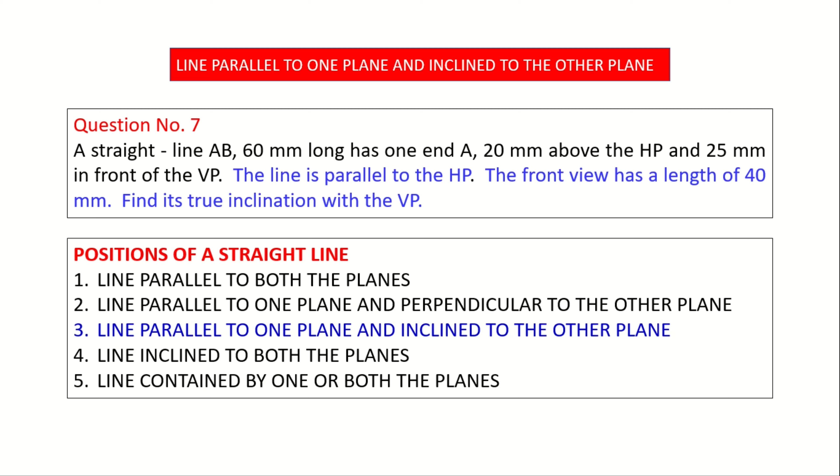It is given the line is parallel to the HP. The front view has a length of 40 mm. Find its true inclination with the VP. So, the position of the given straight line is: the line is parallel to one plane and inclined to the other plane. Also, the true length of the straight line is given, it is equal to 60 mm, and the end point A is 20 mm above HP and 25 mm in front of VP.

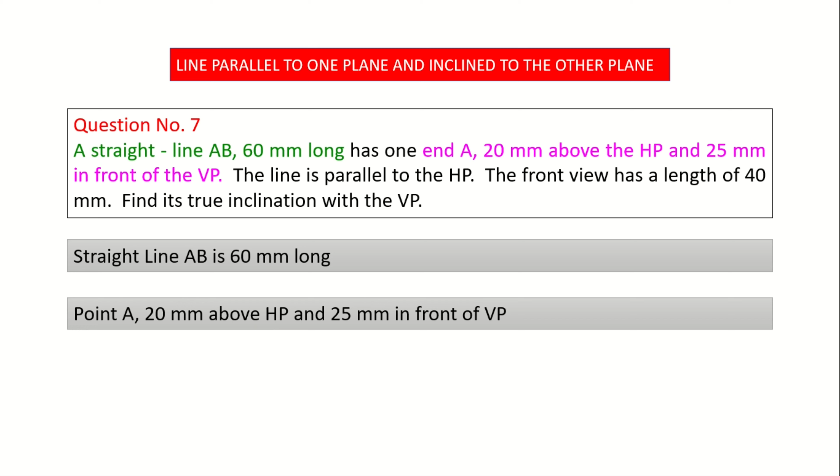Now, let us draw the projection of the given straight line. Take A3 sheet, draw margin on all four sides. Write the question number. In the right bottom corner, write all dimensions are in millimeter. The question given is: a straight line AB 60 mm long has one end A 20 mm above the HP and 25 mm in front of the VP. The line is parallel to the HP. The front view has a length of 40 mm. Find its true inclination with the VP.

First, draw reference line XY. It is given point A is 20 mm above HP. So, front view of the point A, that is A dash, is 20 mm above XY. From reference line, measure 20 mm, mark the point as A dash. This point A dash is 20 mm above XY.

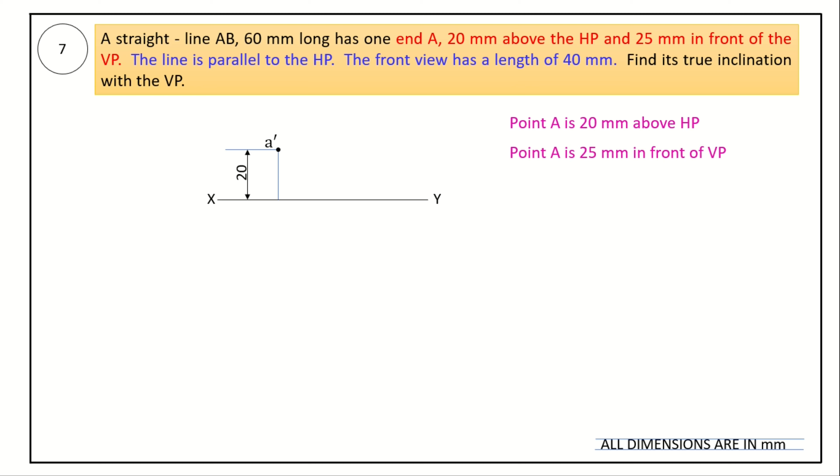It is given point A is 25 mm in front of VP. So, the top view of the point A is 25 mm below XY. From reference line, measure 25 mm, mark the point A. This point A is 25 mm below XY. Here, both the points A dash and A lie in the same projector. Now, draw a parallel line to XY from A dash and from A.

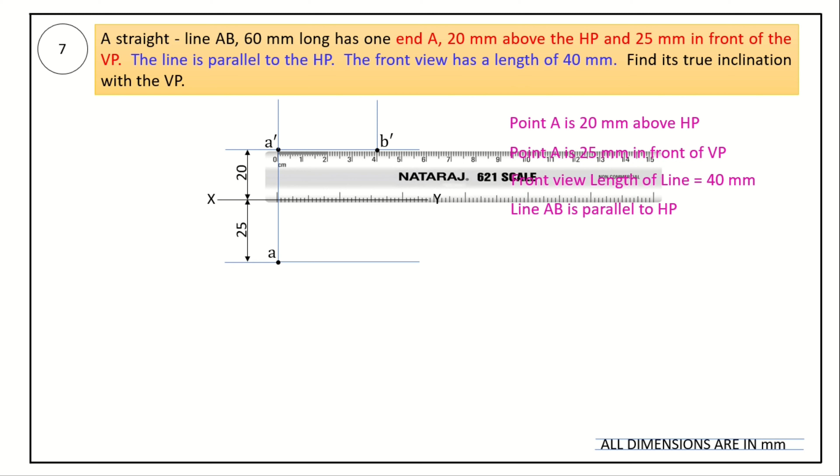It is given the front view length of the line is 40 mm. Line AB is parallel to HP. So, from the point A dash, measure 40 mm, mark the point B dash. The length between A dash and B dash is 40 mm. Here, the line A dash B dash is the front view, measures 40 mm. This line A dash B dash is parallel to XY.

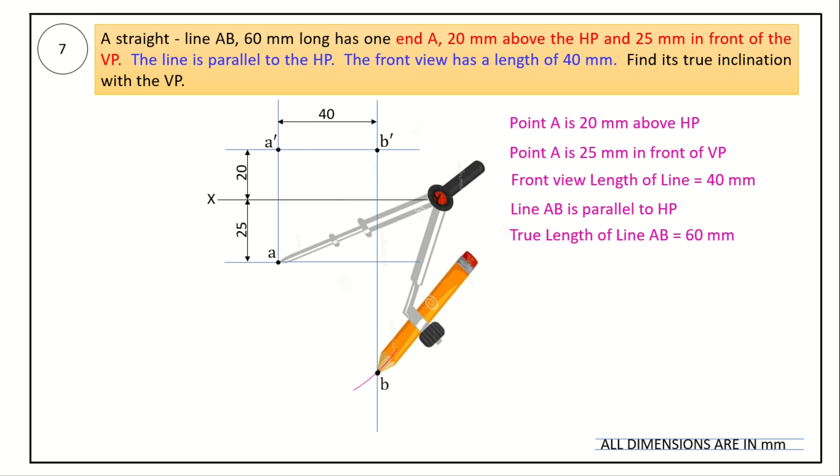From the point B dash, draw a projector. This line is perpendicular to XY. It is given true length of line AB equal to 60 mm. Take your compass, measure 60 mm, center point A, cut an arc. This arc cuts the projector from B dash at a point B. Join AB, this is the top view. It measures 60 mm, that is equal to true length of the line AB equal to 60 mm.

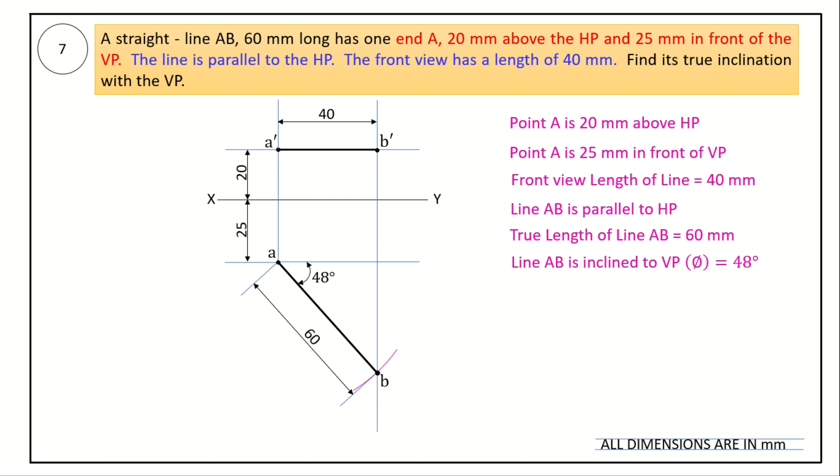Darken the answer A dash B dash, the front view. Darken the answer AB, the top view. Now, using your protractor, measure the angle. It is equal to 48 degrees. The line AB is inclined to VP and phi is equal to 48 degrees. So, here we have drawn the front view and top view of the line and measured the true inclination of the line to VP. It is equal to 48 degrees. So, this is the solution for the given question.